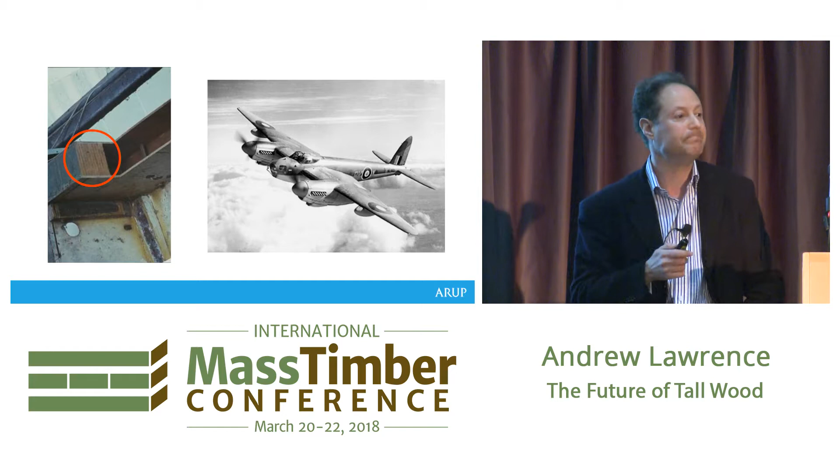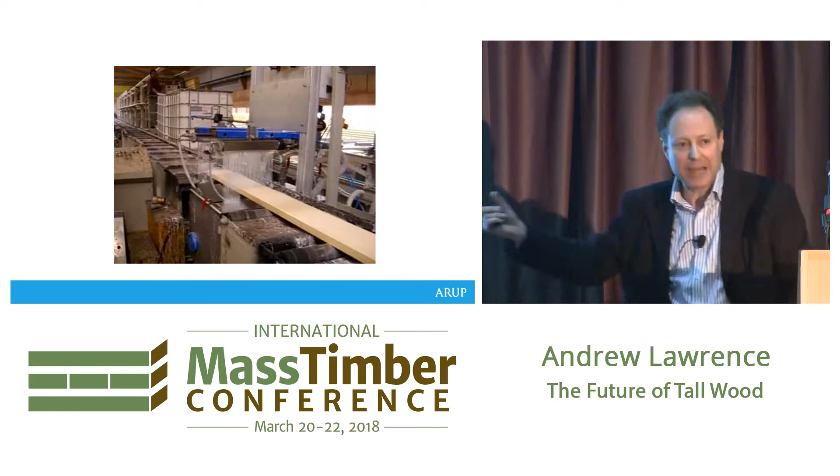Look on the left — that's the detail of the wing, and what you can see is a tiny little glulam beam. So now we've got decent glues, we can take those short lengths of wood cut from the tree and join them end on end using what we call a finger joint — a nice long glue line loaded in shear. We can take that long plank, pass it through a glue curtain: resin and hardener get mixed on the surface of the wood, clamp that together overnight, and we can make really large pieces.

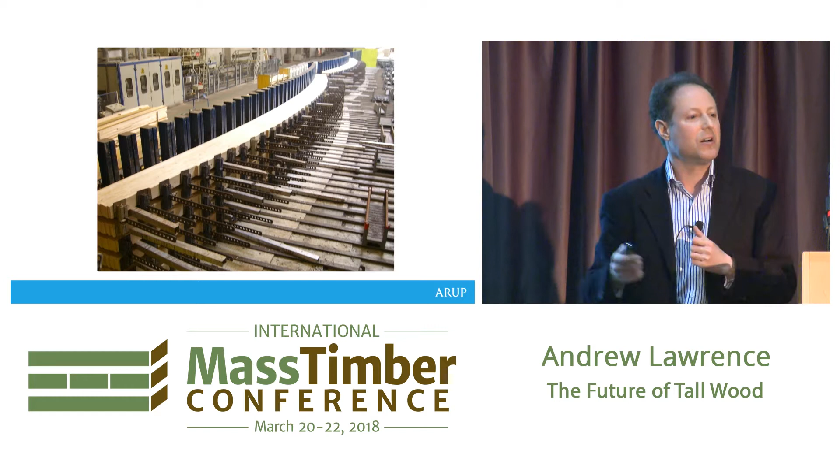But there's another reason we make glulam beams which not many people realize: wood is a natural material, but that means it's incredibly variable in its strength. It has knots, the remains of branches, and if those knots are in the wrong places they can massively pull down the strength of the member. In engineering, we want confidence about strength. There's this amazing thing whereby if we take a log, chop it up randomly, and glue those bits back together, the knots and holes don't go all the way through — so we end up with something much stronger and more predictable in its strength. That's the great beauty of engineered timber.

Glulam beams, really, are what let you make much larger and stronger members. This is the largest glulam beam I've ever seen. Just for a sense of scale, it's compared against one of our graduate engineers.

That's Jane, who actually did the engineering for the Aquatic Centre in London. When we took this photo, we were looking to try and use wood for the roof of the Aquatic Centre. We didn't, in the end.

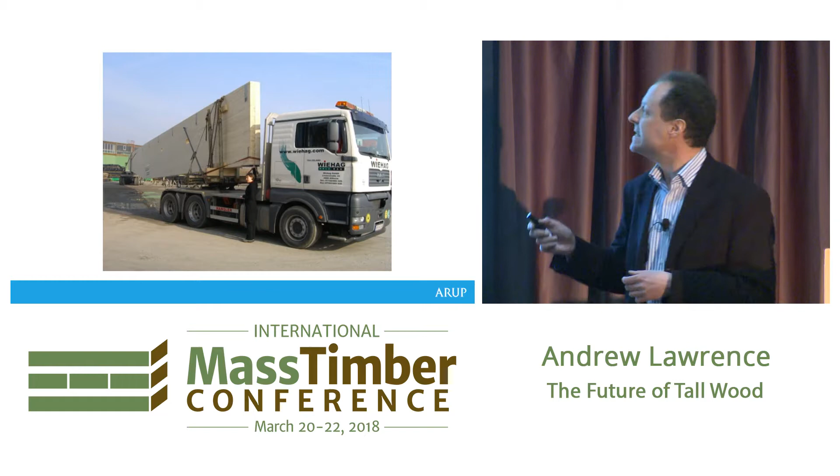Now, of course, wood has always been a massive part of the construction market, but it's very much been for these sort of light frame buildings. Michael Mark showed this same photograph yesterday. These are great - an American invention from the 1830s.

There's a guy called George Snow. He says, let's not do all this labor-intensive mortise and tenon joints - we need to build houses really quickly and cheaply. Why don't we just take some little bits of wood and fix them together with these new machine-made nails? And he came up with this really strange phrase: he said it's as easy as blowing up a balloon. To this day, these are referred to as balloon frames.

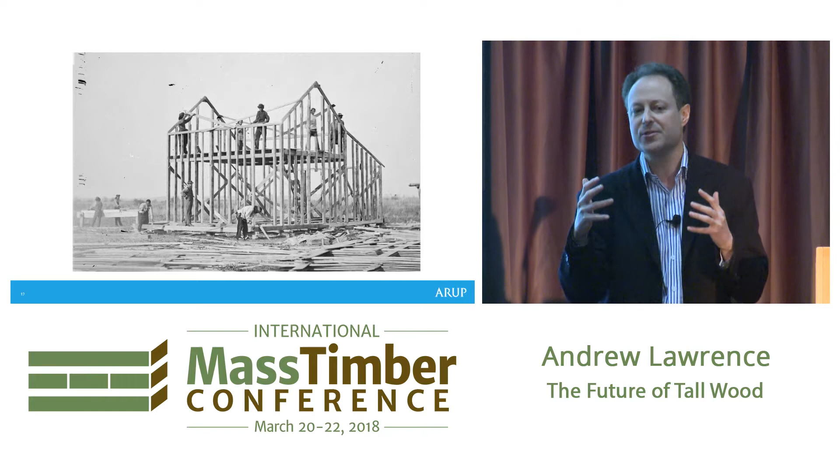But I think that sense in which wood is really easy to build with is something that's really important to remember, because that applies to modern timber construction today as well.

Now, I think the big change we've seen, and you all know this, is that we're seeing much bigger structures now made out of wood. So the question is, why is that? Yes, wood is renewable, but I don't have any clients who will pay more for a renewable and more sustainable building. So there have to be other reasons.

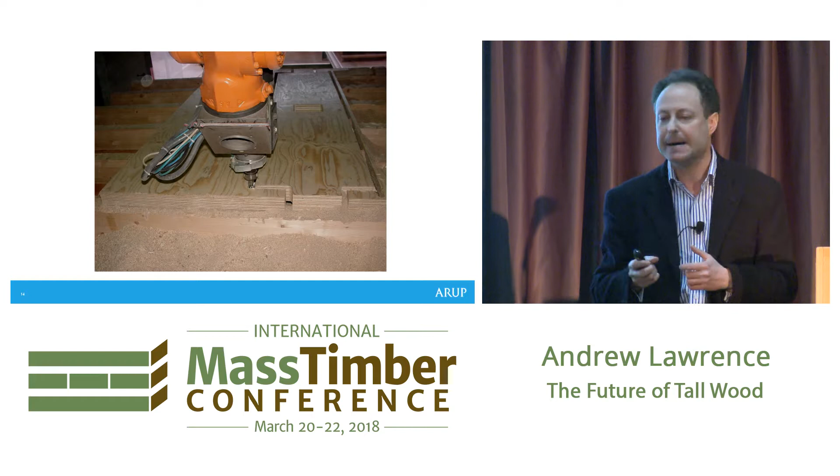And I think there are two reasons. The first is this - this is a photograph I took 13 years ago. When I took this, it was one of the very few bits of CNC fabrication in the structural timber industry. Now just about every factory has one.

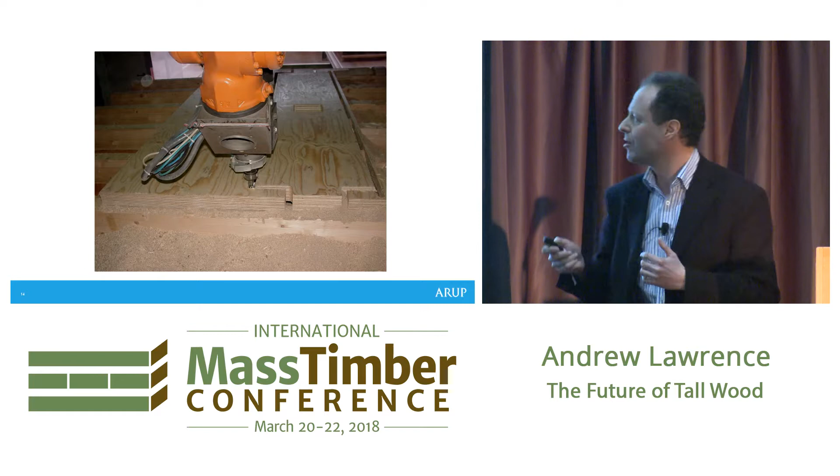We've already heard that with CNC you can machine wood down to a 1/16 of an inch or even better. Compare that to precast concrete, where you're probably only at about 1/2 inch. So really high tolerances. That particular building we built had 459 different pieces. How could you have done that economically in any material other than wood using CNC fabrication?

And obviously the other big wood innovation is CLT. This was only invented in 1998, and it's only been cheaply available for about 5 years. So if you combine CNC with CLT, your wooden building becomes like a giant piece of flat-packed furniture.

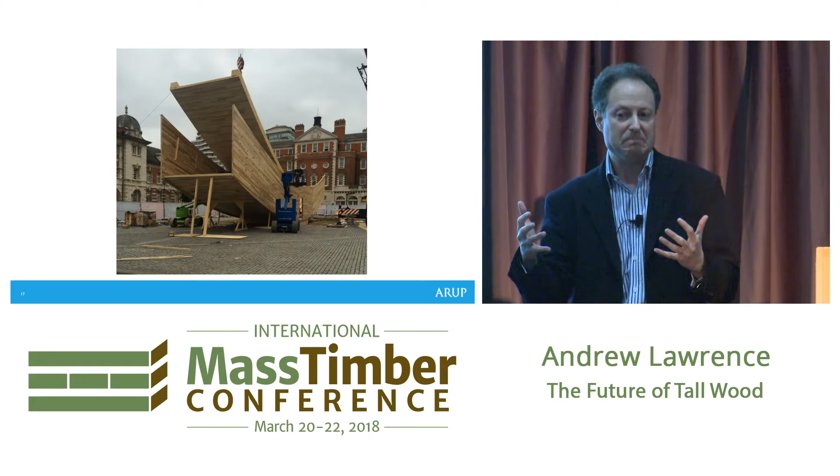So this is a 120-foot long sculpture which we built in London. The entire thing took 7 days to erect. So CNC, high tolerances, large bits of CLT - what wood gives you is speed. And so it fits in so well with this whole drive for prefabrication.

Now this, of course, is the real breakthrough building worldwide - Waugh Thistleton working with Techniker engineers. This was a breakthrough for two reasons. First of all, it was really that first sort of tall wood building worldwide.

But the other breakthrough was that this was wood as a great building material. You cannot see the wood in this building, but it doesn't matter - it's still a great and easy way of building. There you can see all the walls and floors made of CLT, going together very easily.

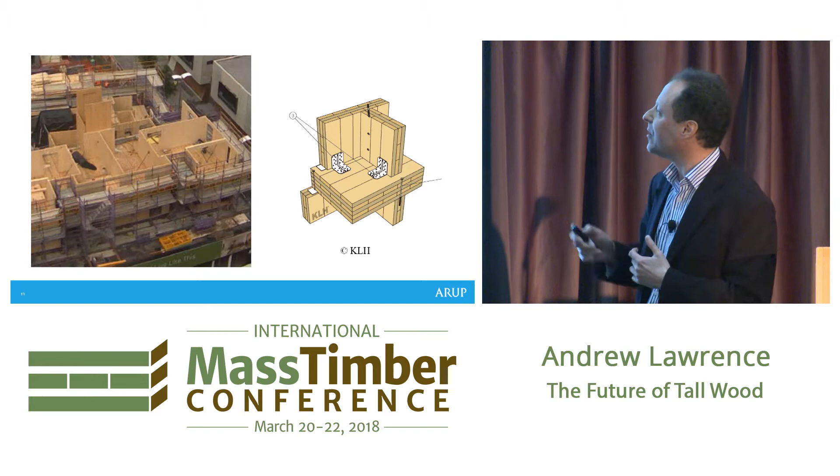So wood - it's about speed, not just the speed of the CLT going up or the wood structure, but the speed of the follow-on trades. It's so easy to screw into wood to fix your services, rather than fixing into concrete.

A lot in the UK, a lot of schools and universities have been expanding with wooden buildings because you can do it really quietly while all the lectures are still going on. It's very simple, safe operations on site - you will never find more than about six operatives actually putting the building up. I haven't yet figured out if it's the same six who go around from site to site.

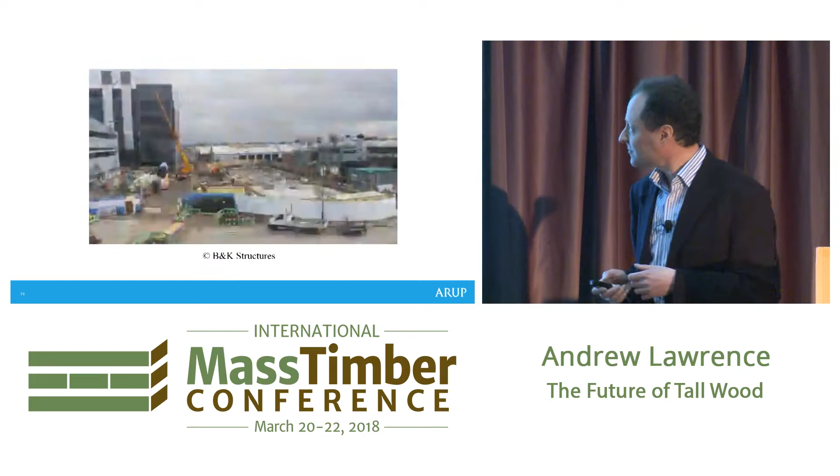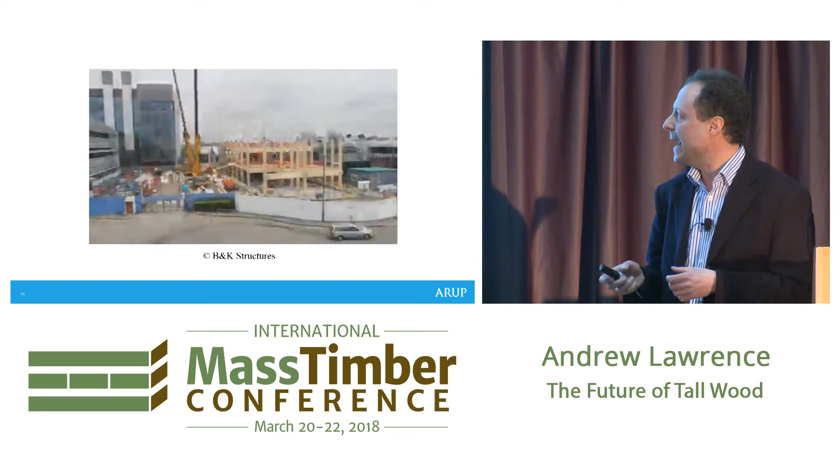Now this was Sky Television. They came to us and said, we want a building in 6 months. And we said, 6 months, impossible - you haven't even got a design. But we said, well, if you want it really fast, wood is the answer. This is speeded up slightly, but it gives you the idea. Now this was going to be - this was an office building.

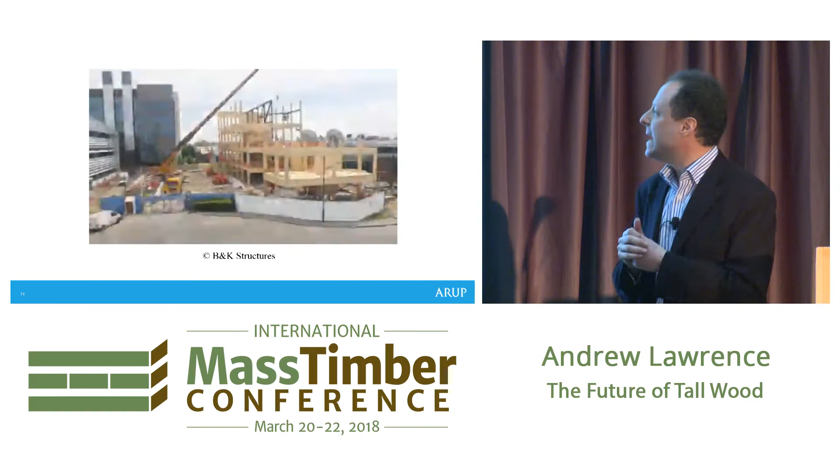So we couldn't have CLT walls everywhere. We wanted something which was open plan. And so what you're seeing is a glulam frame combined with CLT floor slabs.

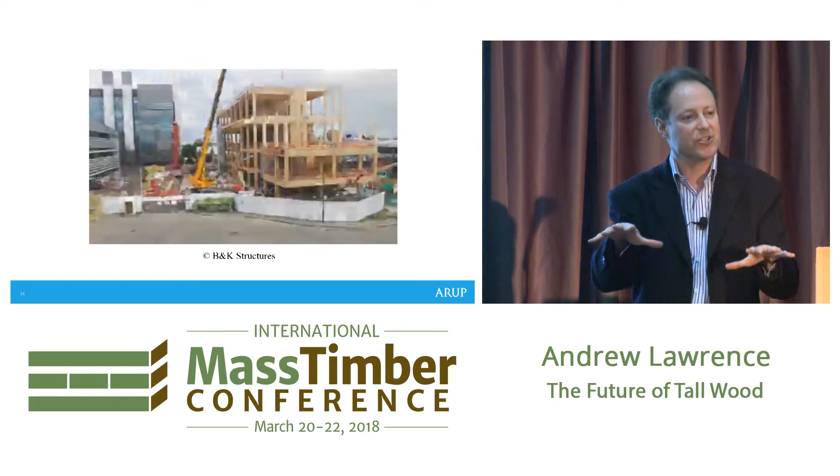They work very well. Now, had I shown you the whole video, you'd see the foundations going in. When the foundations were going in, there were about 30 guys working there, fixing all the reinforcement, pouring the concrete. When it came to the timber superstructure, there were just 6 people. In fact, it was Nick Milestone who's sitting over there.

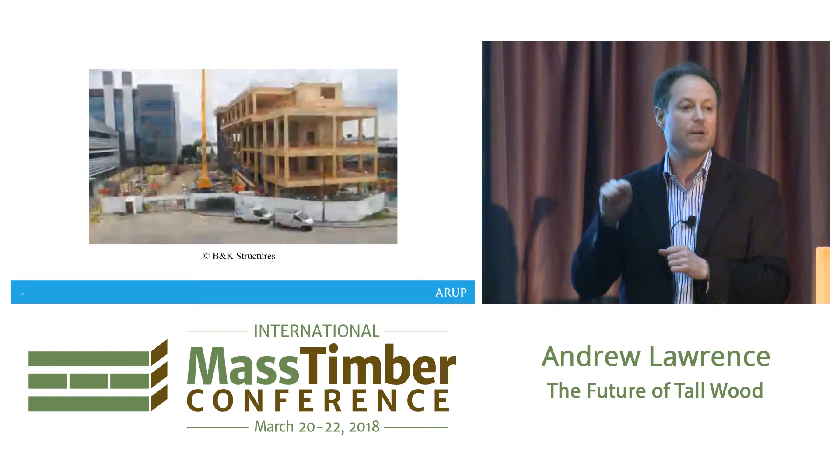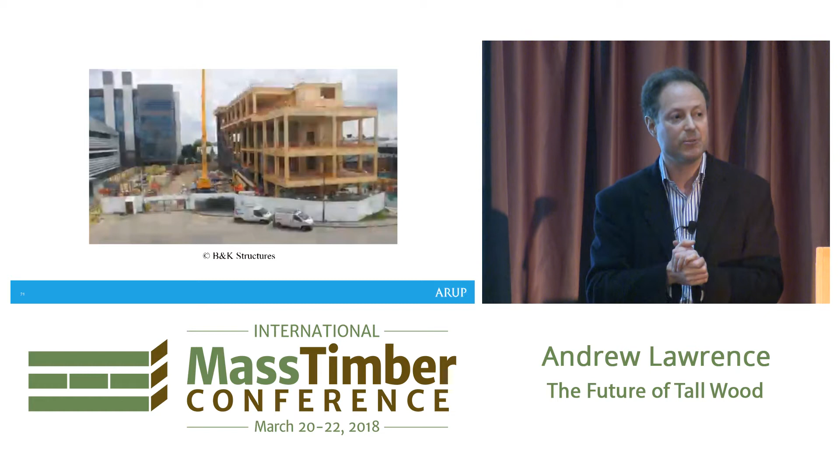That was his team. A very, very quick process, very predictable. And in fact, after that, Sky Television said, wood is our preferred construction material. We want to build in wood rather than anything else. And for the 2 follow-on buildings, one was a gym, one was another office, it was the client actually insisting on using wood. Very interesting.

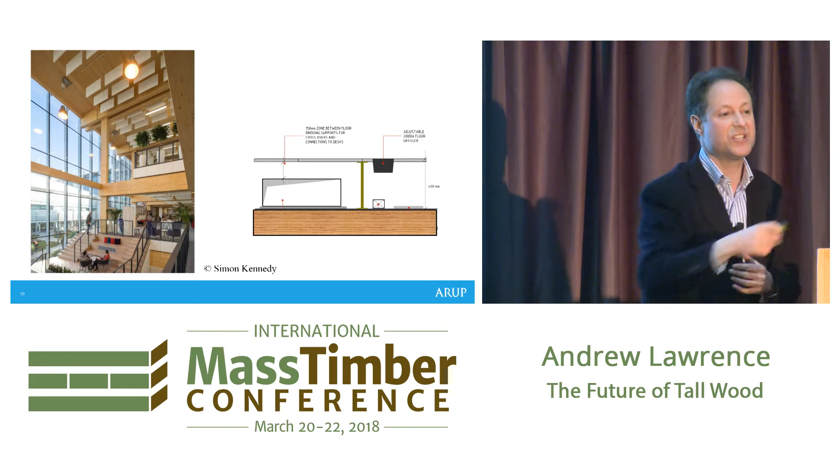So we've literally got CLT with just fairly standard raised floors, and that's all we need. So you can see how that manages to get built so quickly. And if you want an open plan building with a frame, it doesn't just have to be combined with a timber frame. It could be combined with a steel frame.

So there you see CLT as a replacement for a wet concrete slab on metal deck. Now, obviously, that CLT slab is pretty light. So if we think force is mass times acceleration, F equals ma, if you haven't got very much mass, then when you jump up and down on your floor, it is going to accelerate a little bit more.

So it's absolutely true that you will get a little bit more vibration with wooden floors. And so those steel beams you're looking at, they are going to be a little bit deeper than they would have been if that was a heavy concrete floor. But never mind, you've still got that advantage of fantastic speed of construction.

But if you want to, for really long spans and to help with the vibrations, why not think about combining wood with concrete? It gives you a little bit more mass. So this is something which we developed for something called the Life Cycle Tower.

A few of these have now been built. So the idea is just a 4-inch thick concrete slab. The span is about 30 feet. So most of the strength is coming out of the timber beams. So what you've got is something which is only about half the weight of an equivalent concrete slab.

Really easy, in this case precast, easy to kind of crane into place, again fast construction. So really using each material to its advantage.

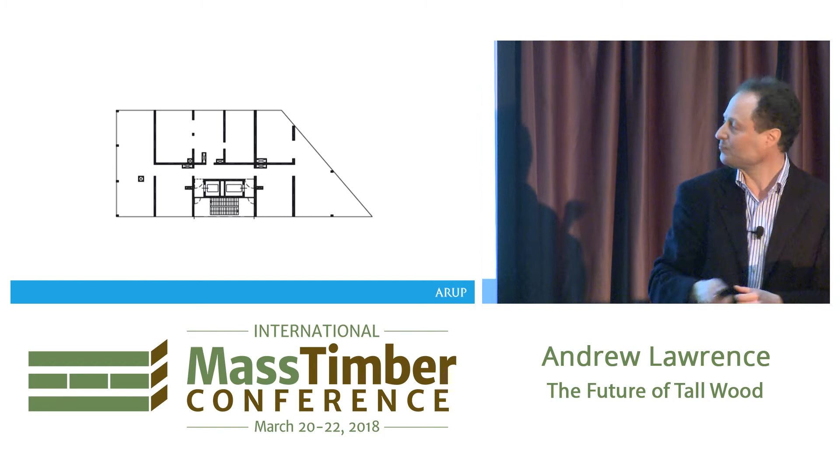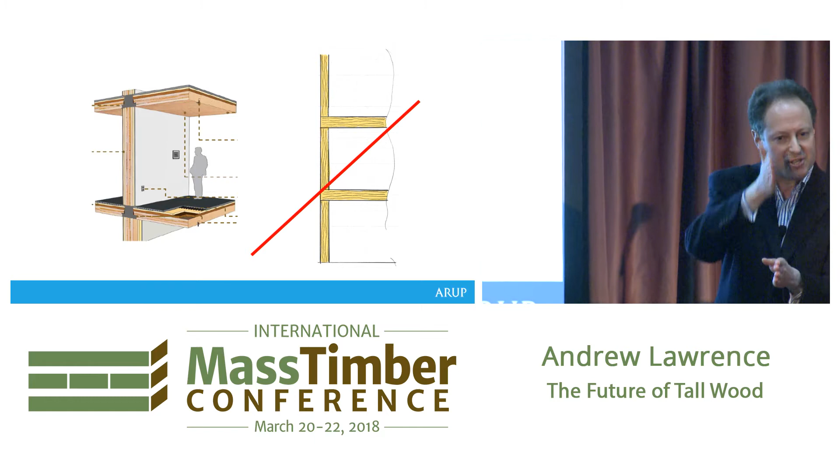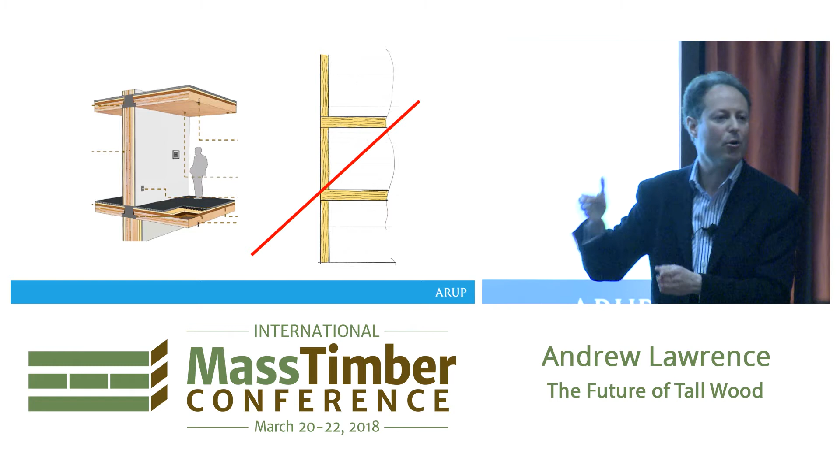Now, to make the walls as stiff as possible, you will know that in lower-rise CLT construction, you do it as platform frame, so wall, floor, wall, floor. But obviously those kind of floors, the wood's going to squash a bit, so it's going to reduce the stiffness of those walls. So what we do is, if we want to go up to 19 floors, we don't do that. We actually basically sit one wall panel directly on the wall panel below. You can see there's a little bit of concrete between the two, but basically we're not squashing the floor in between.

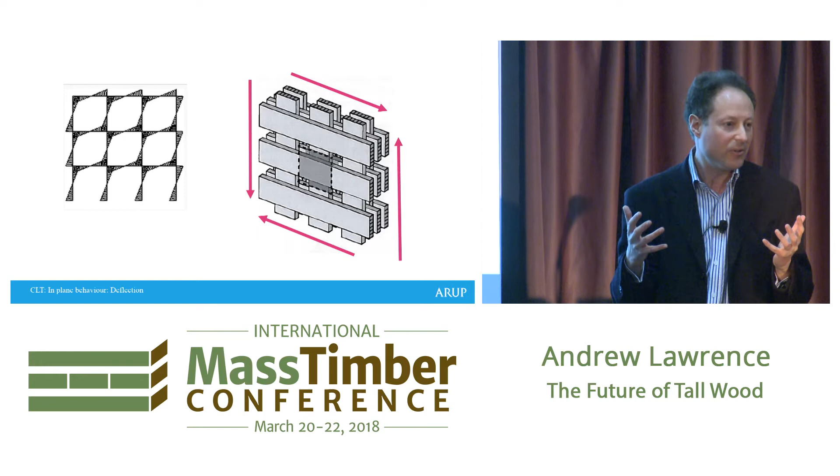Now, we tried really hard on this. 19 stories, stabilising it out of wood was quite a challenge. Why is it a challenge? Well, first of all, if you think about a sheet of CLT, it's a really clever material, but I can tell you on an engineering scale, there's a good reason why universities across the world have been spending years researching this, because you think about how that works. You try and distort that CLT panel in plane - engineers amongst you will realize it's a little bit like a multi-story Vierendeel. It's pretty complex things going on there.

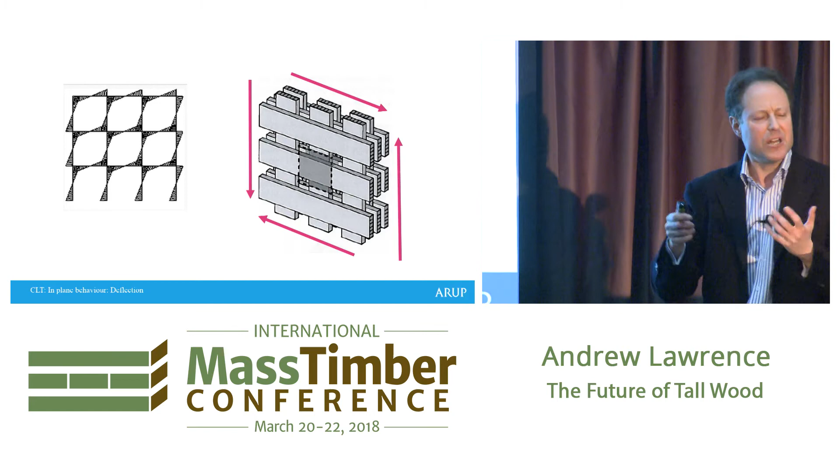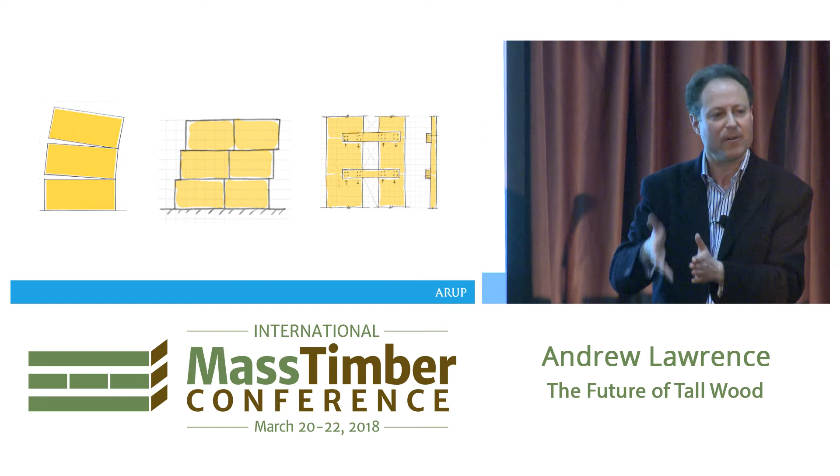Now, if you try and make a big shear wall out of CLT, this is very different from a concrete shear wall, which is one bit all in situ, all joined together. You've got lots of small bits of CLT, all pre-made in the factory, with joints between them, and those joints are never that stiff. And of course, then you've got door openings, and it's very difficult to couple your walls stiffly around door openings. So the result of that is that a CLT shear wall, it's fine for lower-rise buildings, but there's a point at which it's just not stiff enough.

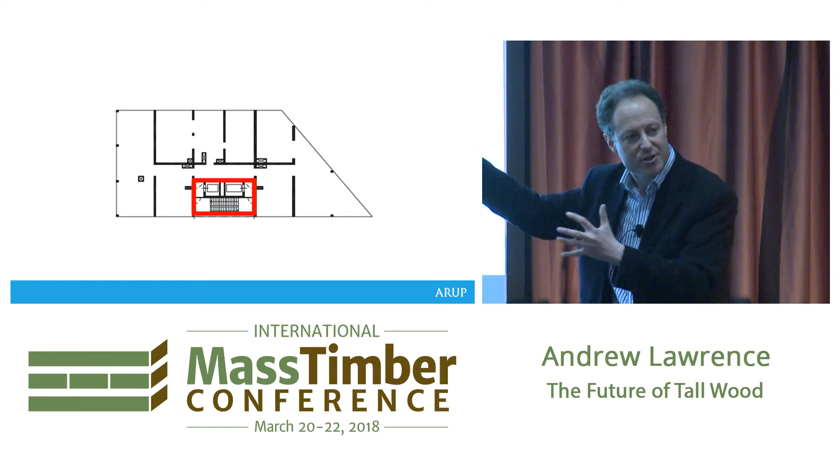And I have no embarrassment in this, because we knew this would probably happen, but we have incorporated a concrete core. So the CLT walls, they take all the gravity, all the loads down the building, so they carry all the weight. They also take that sort of torsion as you get eccentric wind load on the building. But for the main wind loading, that's taken by the concrete core. Have a look at Fast + Epp's Brock Commons - that's 18 stories, so very similar height. Again, it's got a concrete core, and I call it a hybrid structure. I don't have a problem with that. It's just nice that we've incorporated a bit more wood into the buildings.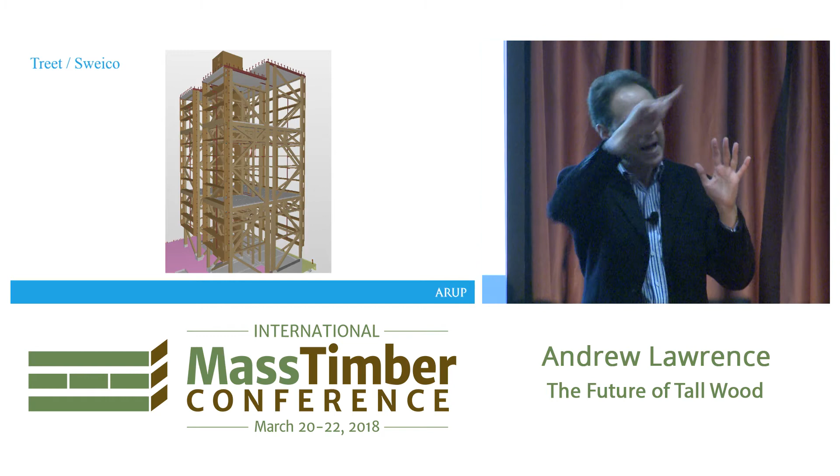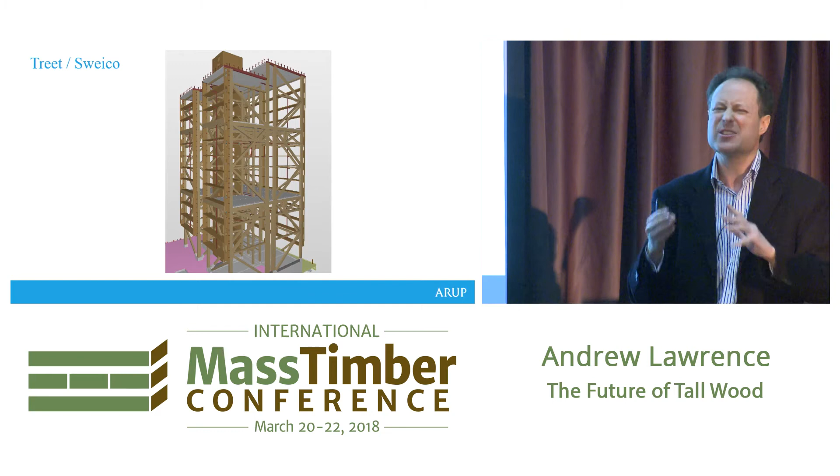Now, the Norwegians have managed to do a tiny bit better, because there they are architecturally prepared to put the wooden structure in the facade. So they're prepared to have these big cross braces in the facade, so you've now got much deeper walls around your building. So they've managed to go up - currently they're actually going up to 18 stories at the moment. So it's not going to work architecturally for many buildings, but you can just about do it.

So this is my kind of summary of that. CLT shear walls are great, really easy to build. They're not so stiff, so you're going to be looking at a span to height ratio of something like 1 to 3 or so for those sort of CLT shear wall cantilevers.

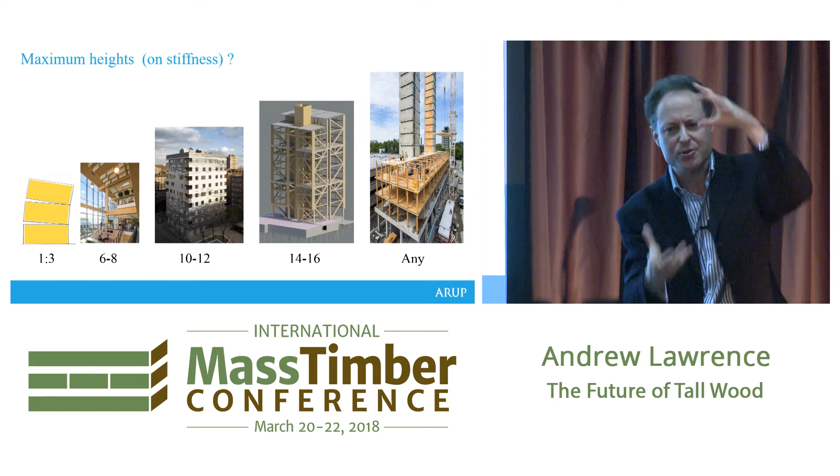So if you're doing, say, an open plan office building, you can have some CLT shear walls inside that. You're not going to want those walls to be too long, because they're going to break up the open plan nature. So about 6 to 8 stories is about right to get enough stiffness for those open plan timber offices.

Now, if you go for something like Stadthaus or the Framework building here in Portland, obviously it's residential, so you naturally have a lot more walls. Sticking within my sort of 1 to 3 criterion, you can go up to about 10 or 12 stories or so, and that's still sort of strong and stiff enough. And if you're prepared to do what the Norwegians do and have some external bracing, you can get up to maybe 14 or 16. The Norwegians have managed 18 on their current one.

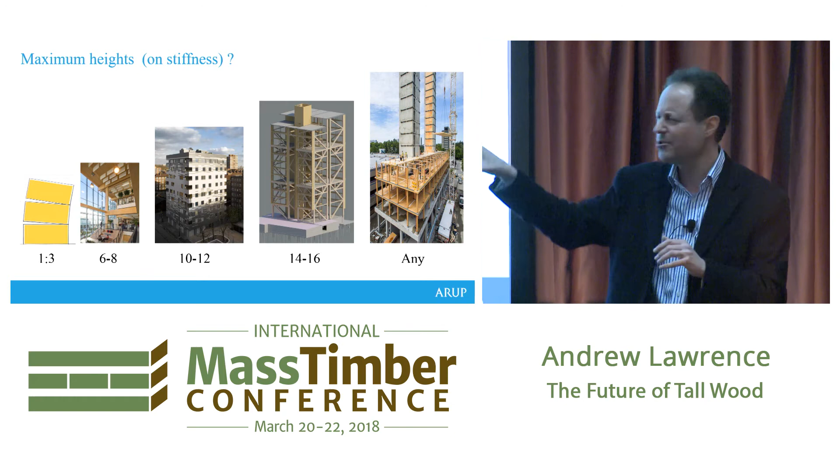These are not absolute numbers, they're just to give you a very rough feel. And if you want to go much above that 14 to 16 height, nothing wrong with incorporating a concrete core.

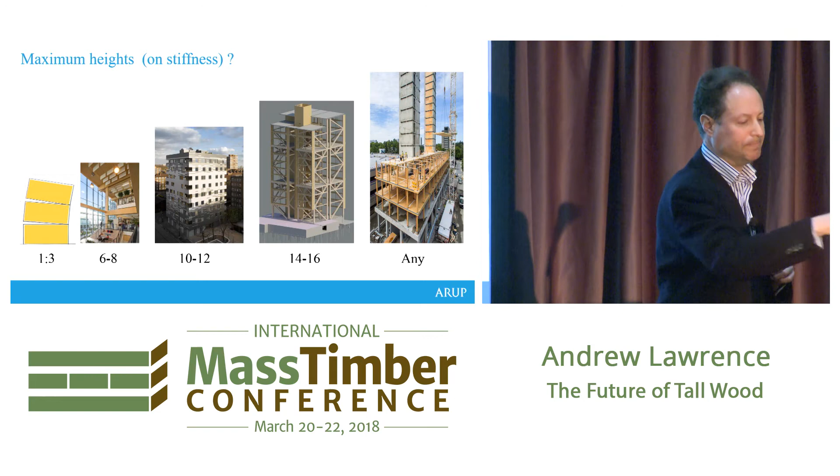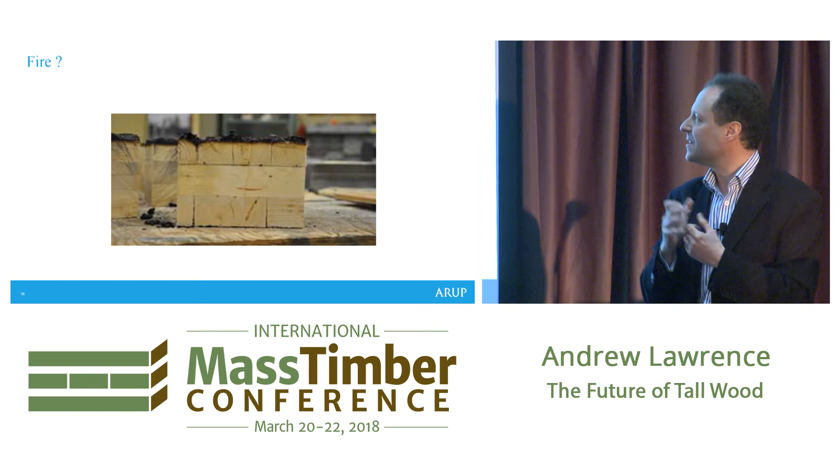Now, we shouldn't just talk about stiffness and vibration and strength. There are obviously other things which affect height. Dave Barber spoke yesterday about fire, the fact that wood chars very nicely, so that charred layer insulates the wood behind.

But obviously, if you start doing bigger buildings in wood, you need to think about that extra fuel load that you put into the fire, and you need to make sure that your structure survives the fire, because there's still going to be people stuck high up the building if you're doing a bigger structure.

So the wood works fine. It simply means that for bigger, taller structures, you're going to start progressively covering over more and more of your wood structure. But as I say, it still makes a really good structure hidden behind the fire protection.

And the final thing, of course, is gravity. Obviously, as you go tall, you've got more load on your columns, and those columns are going to get bigger. And there's going to come a point at which the client is going to say, well, if I start having these big wooden columns, that's going to take up my lettable area. Can we make them smaller? Can we make them steel or something like this?

Now, obviously, Brock Commons has got columns at sort of 10-foot centres, and so that's kind of fine. But you can imagine that's pretty much going to be the limit, and generally people are going to want a lot less columns.

So this finally is my prediction for the future, really, in terms of what we will be building in 10 years' time. As Jeff said, at the moment we're very much in this research phase. You can build all sorts of things in wood, and that's great, but the question for me is, where is it sensible structurally? Where can it compete economically? Because that's the long-term story.

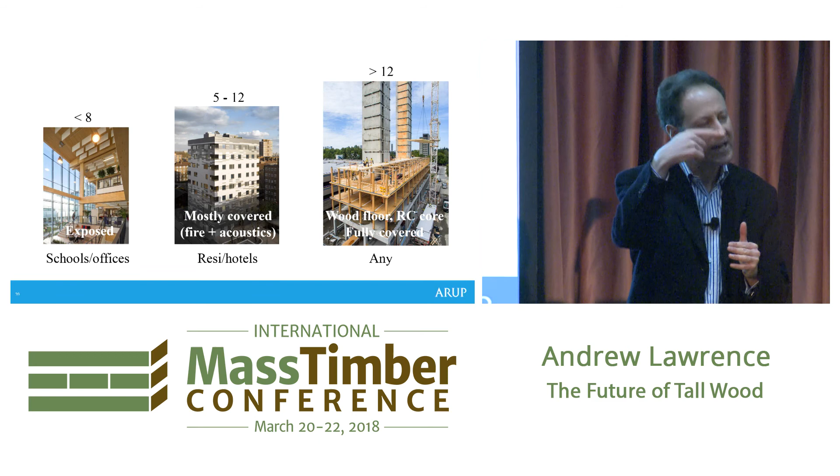So about in that sort of range, 5 to 12 stories. Remember, 12 is my sort of upper limit for what we can roughly stabilize with CLT shear walls. I've said 5 to 12 because below 5 stories, it's going to be light frame timber. Nothing, that sort of balloon frame, nothing can compete with the cost of balloon frame type construction at those lower levels. But once we get above the limits of what that can cope with, then that's where your sort of CLT massive timber construction kicks in.

And then above that, no reason why you can't go above 12 stories. Two provisos: first of all, you're going to need a concrete core to make the building stiff enough. And at roughly that sort of height, you're going to start needing to cover over most or all of your wood to really stop it engaging in the fire. So I will come back in 10 years' time and see if I'm right.